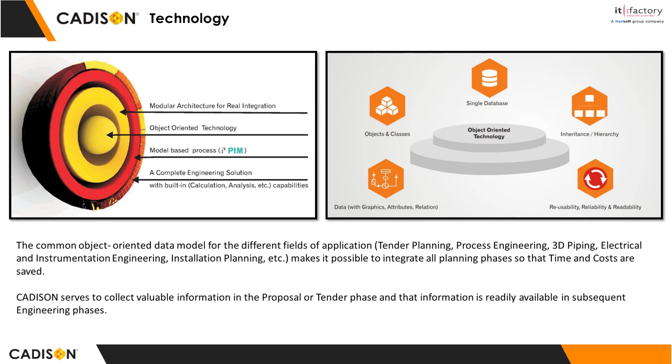Cadison is a fully integrated multidisciplinary engineering solution that combines the entire engineering workflow in one system and unites engineering data and graphics to deliver the latest updated information of the project. This automated technology, we call it I-squared PIM, that is Intelligent and Integrated Plant Information Modeling. The core of Cadison is object-oriented technology, which makes it different from other solutions. On top of this object-oriented technology, it has a modular architecture with a single database for real integration. Cadison addresses project needs with its integrated workflow and intelligent functionalities, as well as meeting standardization objectives at an enterprise level. Cadison enables entire project lifecycle integration from proposal engineering to as-built stage. Its built-in application includes project setup and project document management along with costing calculations.

So let us discuss some challenges faced by process industry teams today while working with other tools available in the market. The first is the absence of a built-in database and user or document management system. The absence of a built-in database leads to reliance on external third-party databases like SQL or Oracle, which in turn leads to additional project costs. Similarly, the absence of a user or document management system will limit internal communication and collaboration within the team, and lead to a lack of security and control of documents.

Next is lack of integration and collaboration. Multiple systems mean multiple databases and multiple teams, which leads to redundancy of efforts and data inconsistency. Everyone today needs smart output and deliverables, but existing tools, which are only CAD-based and only modeling software, are ineffective in delivering such results.

Another important challenge is efficiency during design, since they are using multiple tools. There are lots of errors and inconsistency in data involved since there are multiple disciplines and multiple teams involved. Next is lack of reusability and modularity.

Reusability and modularity are very important aspects today. With CAD-based solutions or non-intelligent databases, it becomes difficult to reuse data to use the project efficiently. A lot of time is needed for redesigning the same plant or same unit, and that's why costs go up.

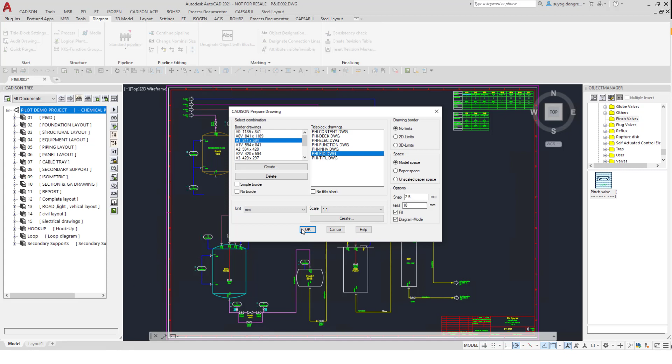Cadison has default templates or sheets for P&ID creation, where we can select the sheet size like A0, A1 and so on, and also define the scale or unit of the drawing, and we can see that the title block gets generated into the P&ID.

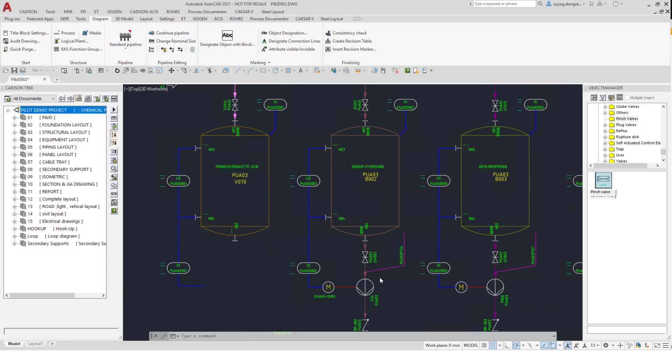Coming back to these vessels and nozzles, as we all know nozzles are always associated with the vessel, this child and parent relationship is maintained between the nozzle and vessel, which you can clearly see in this picture. Similarly, we can see other components placed in the drawing like pumps, which also maintain this child and parent relationship.

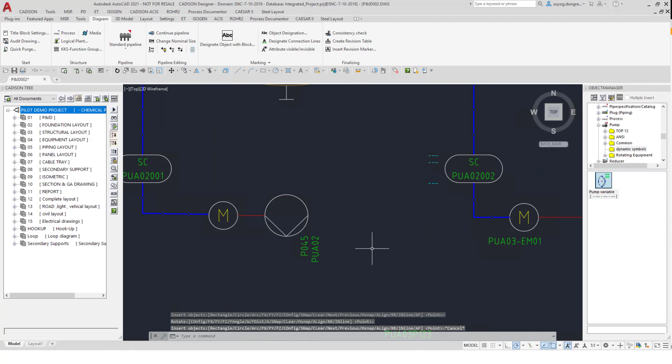Let us place some components from the library, that is from Object Manager, into the P&ID Designer using drag and drop function. Reference lines which we can see will help us place this object with proper alignment at the desired location. Now once the components are placed, we will route the pipeline.

We have defined the medias required for this project, to which different pipe specifications and catalogs are attached. Now using the standard pipeline dialog box, we will select the pipeline and choose the media. We will select the required pipe specification, select the nominal size, and start routing the pipeline.

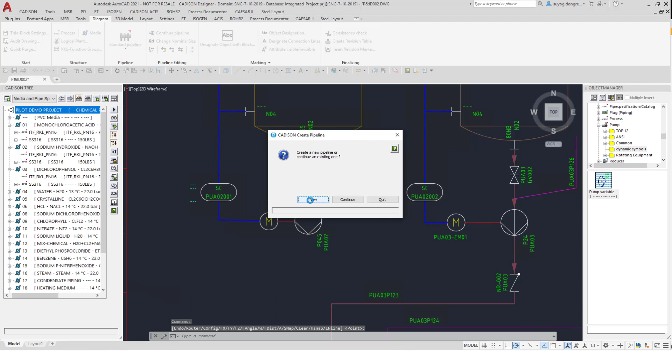So here first we will go with the suction pipeline, which will start from this nozzle and continue up to the suction side of the pump. In a similar way, we can create the pipelines for the different routes available in the P&ID.

Once these pipelines are routed, we can complete them by adding various inline components like valves, instruments, miscellaneous components, etc.

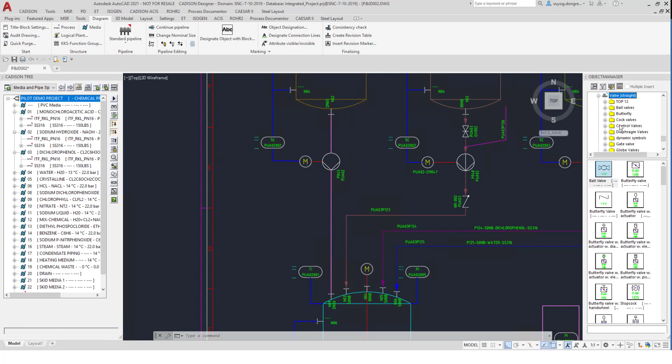Cadison has a functionality of creating assemblies of groups of objects known as construction sets, which are stored permanently in the library, that is in the object manager. We have such a construction set ready in the library.

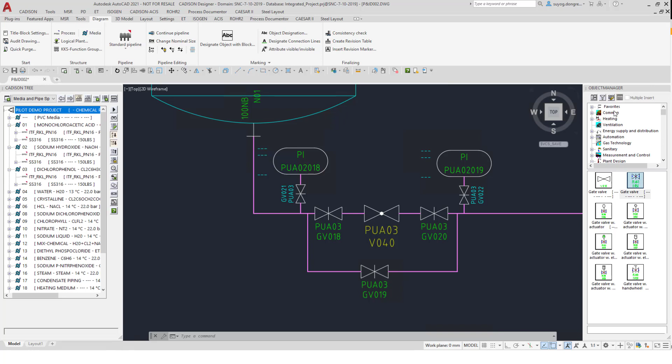We will drag and drop this existing assembly or construction set into the drawing, and place it at a desired position. Once we are done with the assembly placement, we will update the drawing for getting desired results.

In spite of being a construction set, it is an intelligent object and the data can be modified individually. We can also see that the catalog information is retained in the object.

We have a function, object designation, which helps to designate objects like pumps, tanks, heat exchangers or pipelines with the desired configuration. Here we have configured the designation to view pipeline number, size, media and specification on the pipeline object. Using this object designation, we can tag the number of pipelines at the same time.

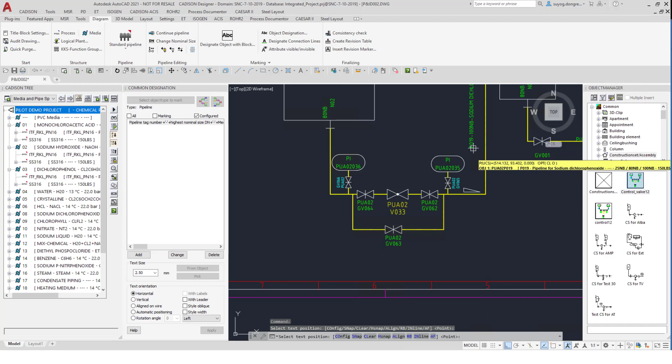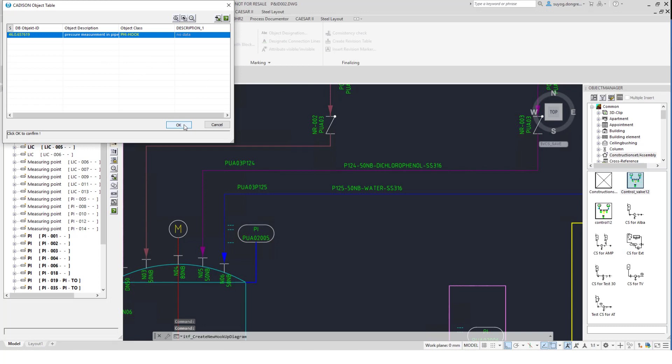Cadison provides built-in functionality for hookups, using which we can generate the hookup drawings of measuring instruments such as pressure indicator, level indicator, pressure transmitter, etc. When we execute the command, a separate document group or folder is created for these hookup drawings, from where we can open this drawing.

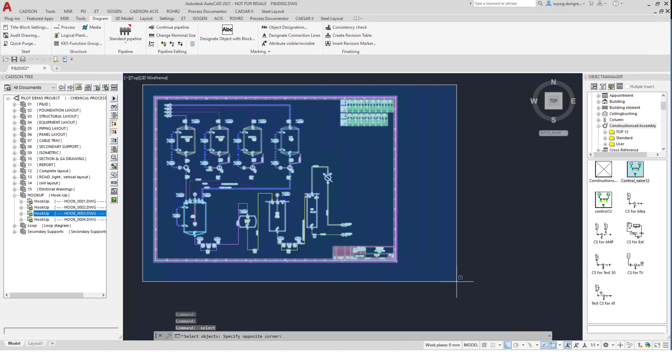Cadison provides multiple ways to edit and fill the data. In order to update the data in bulk quantity, we can select the data and export it to CSV or XML format. We can add the required information to these properties available in the CSV file, and re-import this file back into the designer.

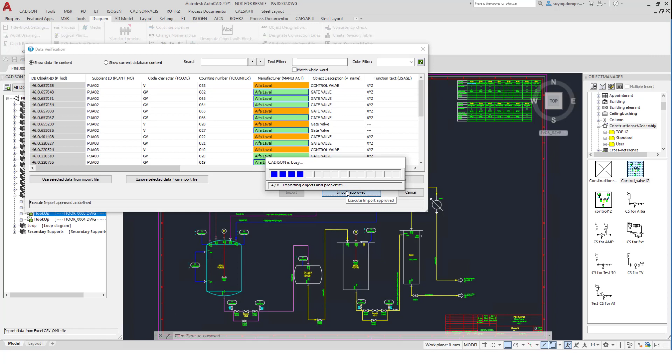During the import process, it will ask you to verify the data which we have entered in the CSV. The data which we have added gets highlighted in yellow color. Also, depending on our selection, this data will get highlighted in red as well as green color. Once we are done with this import process, the data gets updated into the P&ID drawing.

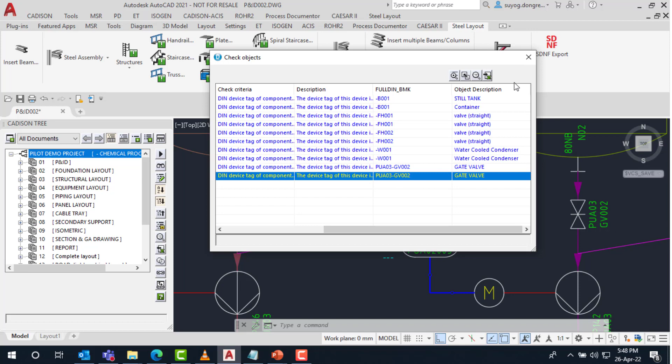Cadison facilitates logic analyzer features that consist of predefined logic checks. Let's check for the uniqueness of equipment codes. We can see the error that two of the components are assigned with the same tag number. We can even highlight the object to see the exact location.

In case of a number of errors to be solved in a large project, we have a logic analyzer container where we can store all the queries and update the wrong data in the container itself.

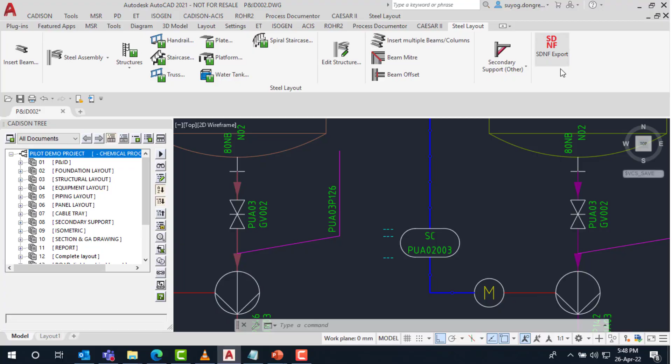This is one sample example of the equipment list which we have created. Likewise, we can generate a number of reports under one document group, and in this way list out the different objects used in the project.

Moving ahead, Cadison 3D Designer proves to be a comprehensive solution for creation of intelligent layouts like equipment layout, piping layout, isometrics, GA drawings, calculations and report generation. We also have predefined quality checks like logic analyzer for carrying out logical checks in the drawing. Let us have a look at a sample 3D drawing created in Cadison 3D Designer.

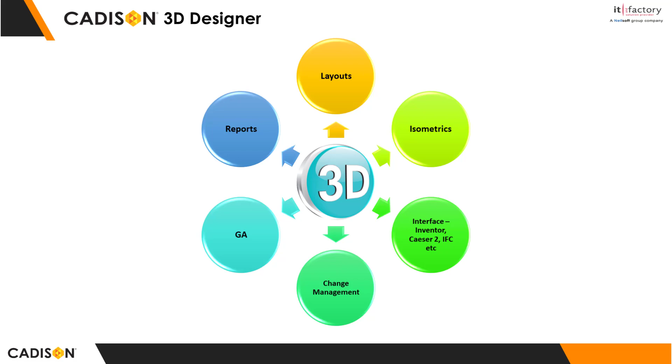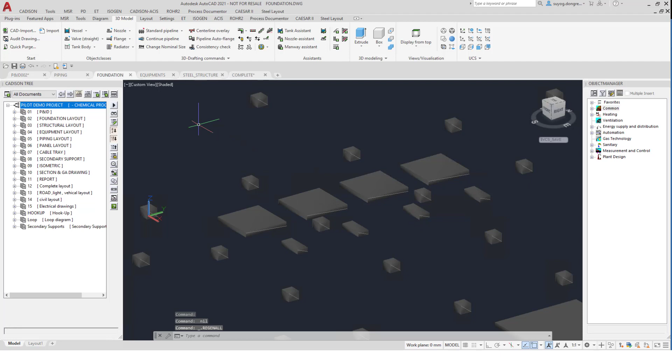This is the interface of Cadison 3D Designer which runs on top of AutoCAD. We have menu bars at the top and ribbons below the menu bar from where we can place objects in the drawing. We can see that there are different sections available like foundation layout, equipment layout, piping layout, and structural layout.

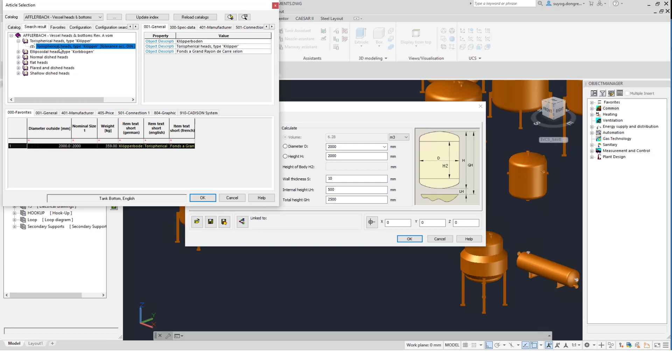Now we will see how to add different types of vessels into the drawing. Tank Assistant is one way of vessel creation, through which we can create vertical vessel, horizontal vessel, or special vessel. We can define the inputs for the tank components like shell, dish head, legs, etc., and even save this configuration to use later with all the necessary parameters required for vessel creation.

Also, we know that this vessel is already placed in the P&ID drawing, so we can link that vessel to this 3D graphic. This shows that Cadison works as one integrated system and uses a single database. We can then place the vessel in the drawing at the desired position, having all the intelligent data inside it.

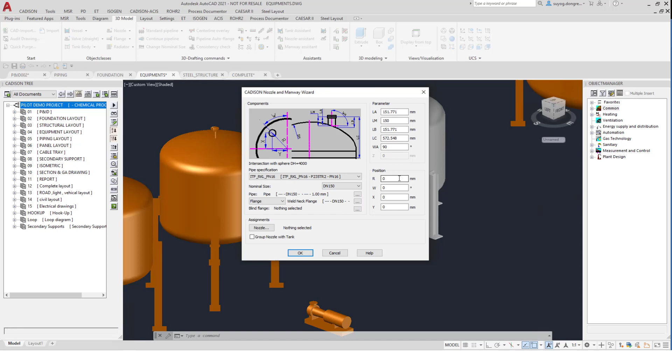In order to provide pipeline connections, we will add nozzles to the vessel, for which we have the Nozzle Assistant Wizard. Based on the type of surface selected, the Nozzle Assistant dialog box opens up, where we can feed inputs for the nozzle as per the parameters shown in the figure. We choose the pipe specification, nozzle size, type of flange joint, and we can see the nozzle has been created. We can also easily edit the nozzle once it is placed in the drawing.

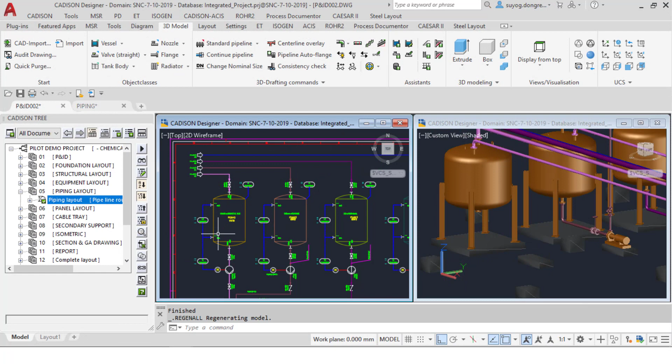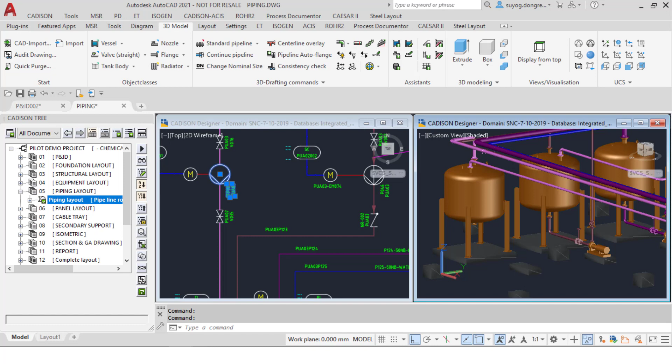Now, after placing the equipments, let's create a pipeline. There are many ways to create a pipeline in the project, and we will see them one by one. We know that this P&ID is already created, and Cadison works as an integrated system using a single database. First, we will go with the drag and drop option to create the drawing in a 3D layout. Here we can see that this pump is already created in the P&ID drawing, so we will utilize the same pump to create the drawing in 3D.

So we will just drag and drop this pump. Here we can see that the graphical objects for these pumps are automatically generated, and we can place this pump into the drawing as per the required coordinates. So now we will place this pump on the foundation.

Here we can see this Cadison integrity function, and it helps us to synchronize the data within the different modules.

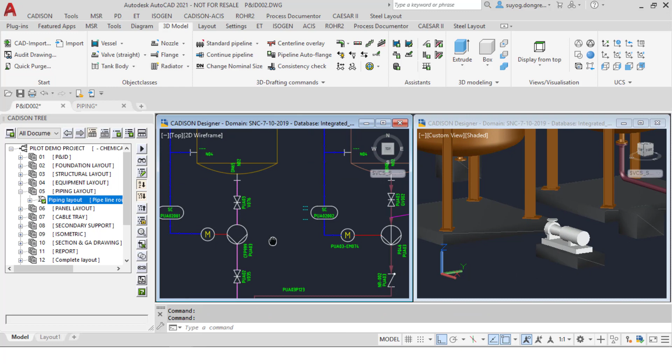In a similar way, we can create the pipeline. Let us drag and drop this pipeline from P&ID drawing into the 3D drawing. Once we drag and drop this pipeline from P&ID to the 3D, this standard pipeline dialog box will open.

As this pipeline is already created in the P&ID, the pipe specification and the media properties are disabled for further addition.

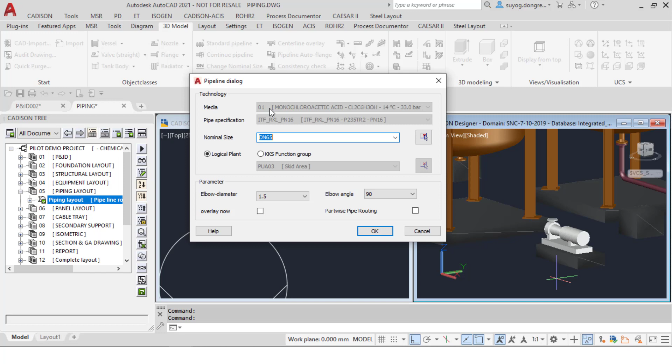Also here you will see two options: one is overlay now, and the next is part-wise pipe routing. This helps you to route the pipeline. So first we will go with the overlay option.

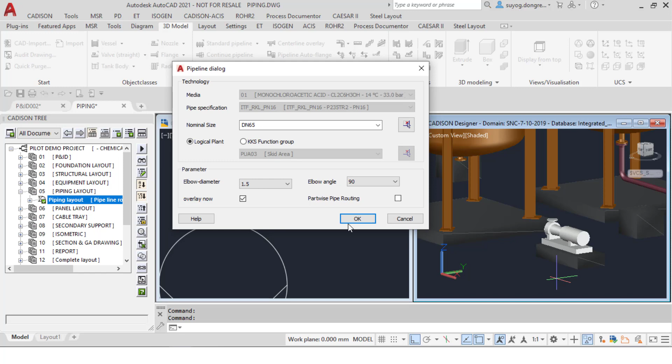The overlay option uses a single line representation, and with the help of this, the pipeline will get created. Being a Cadison intelligent object, we have predefined connection points which help us create the route for the pipeline. Here we have selected the first point of the nozzle, and now we have created the suction side of the pump.

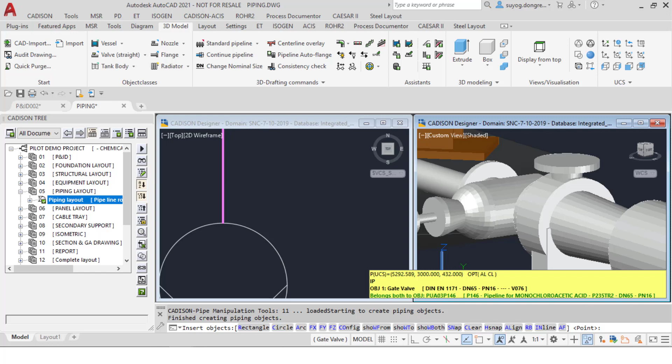As soon as this route is completed, the 3D graphic for this pipeline has generated, and based on the direction, elbows, flanges, gaskets, etc. are automatically created.

Now we will complete this pipeline by adding inline components, for example a valve. Again we will drag and drop this valve from the P&ID to the 3D, and try to place it on the drawing.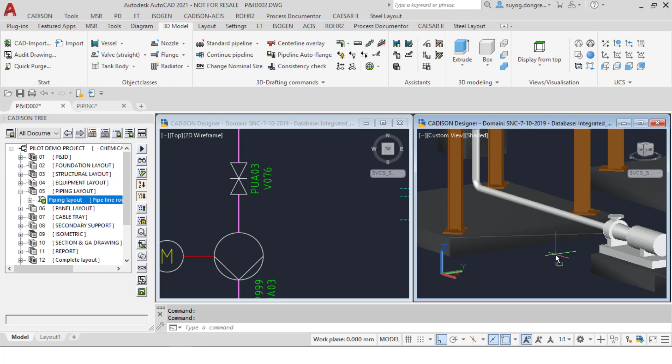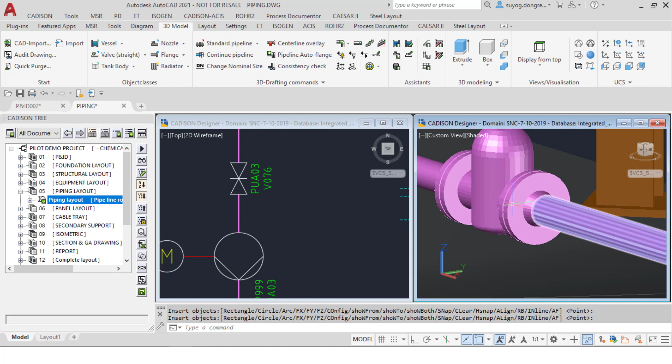Here you can see that this automatic graphic has generated, and once we place this valve on the pipeline, it will automatically create the counter flanges as well as the gasket as per the pipe specification which we have attached. Apart from that, once we are done with this object placement, we can move and rotate these objects on the pipeline.

Now let us route another pipeline from pump discharge to the tie point. Again, in the standard pipeline dialog box, we can select the media, we can select the pipeline, we can select the specification, and before clicking OK, we will select the checkbox for the part-wise routing.

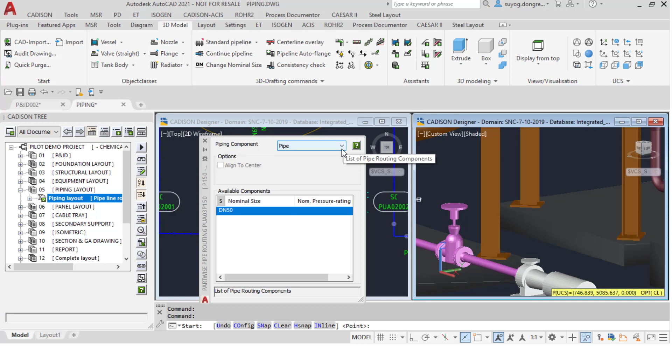A dialog box will open up which shows the piping components from where we can select the pipes and fittings for the line. So when we start drawing the pipeline, the piping components are generated automatically, like flanges, pipe, elbows, tees, etc.

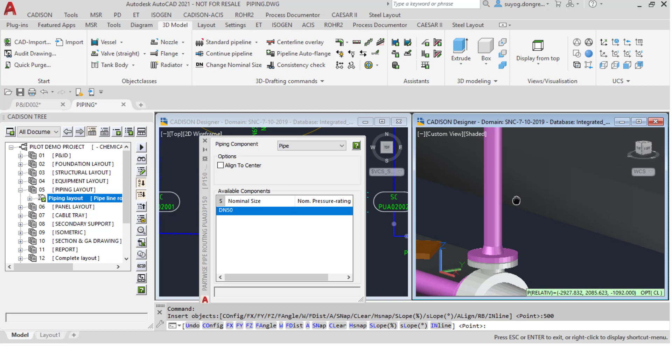As we change the route by cursor, the command automatically predicts the next component as an elbow, and we can continue the pipeline without any interruption. In this way, we can instantly create pipelines for our project.

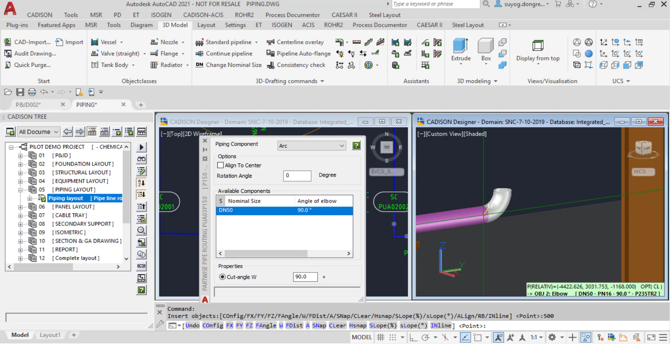Now suppose if we want to create a T connection in between, then we can select the T from the dialog box, and the same is reflected in the drawing. In such a way, we can manually select the components and complete the pipeline routing.

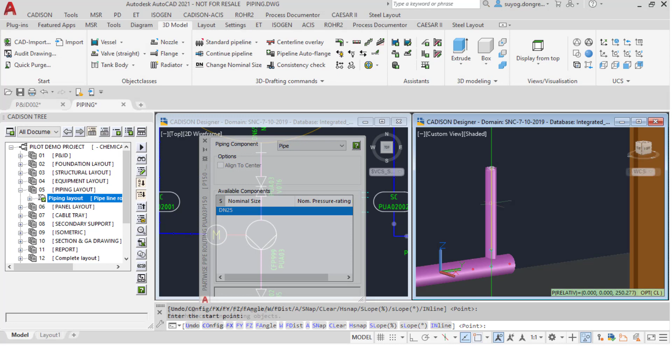Also, we can continue the pipeline from where we left off. Here we will continue with the T branch and route the pipeline. We can see that based on the dynamic input, the pipes and fittings are allocated to the cursor, and we can carry out this pipe routing till the end.

And this is how quickly we can reproduce this pipeline with the part-wise pipe routing command. Now we will complete the pipeline by adding valves to it. We can directly select the valves from the catalog.

The catalog is the set of data where we have defined the object properties, and based on the requirement we can configure the selection, such as the type of drive like manual or pneumatic. We can select the spacer type and then select the valve.

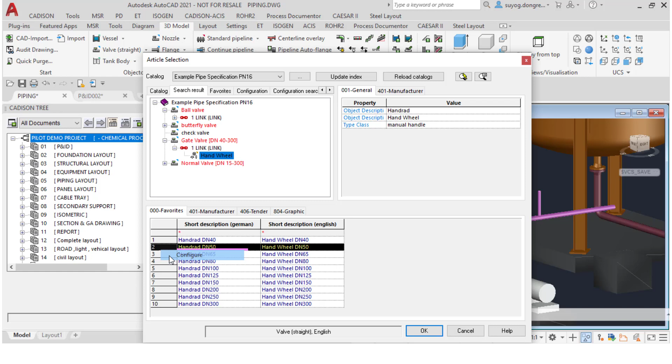Instead of having a number of objects with different attributes and types, Cadison allows you to manually configure the object type. This helps the user create their own configuration sets, which can be saved in the library for reuse.

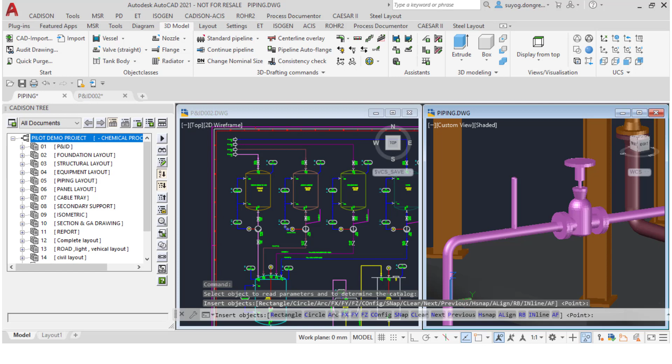So we will place the valve in the pipeline, and being a Cadison intelligent object, the counter flanges and gaskets are automatically created as per the specification used, and later on we can move or rotate the object within the pipeline as desired.

After placing all these components, we will place primary supports on the pipeline. We can choose different types of primary supports from the catalog and place them on the pipeline.

Here we can see that we can configure the different types of supports, configure the material, and save this configuration for reuse.

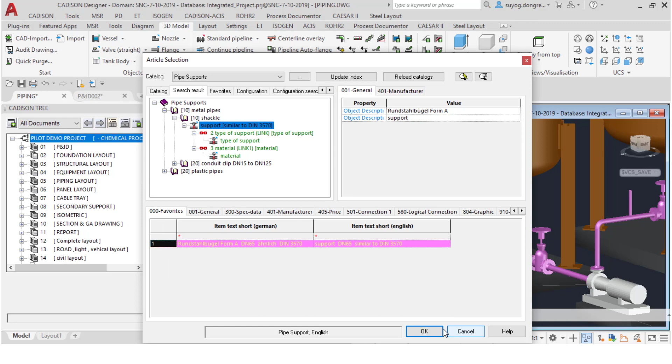Once we place this support on the pipeline, it changes color, showing that the support is linked with the parent object, the pipeline, and forms a part of it. This support will also appear in the isometric drawing. In the same way, we can place the rest of the supports on the pipeline.

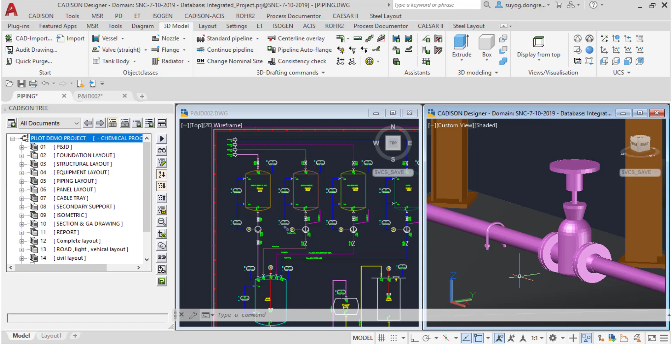Now we will move on to the isometrics. Cadison has an isometric generation wizard where you can select the pipeline for isometric generation. Here we can select the document group, sheet size, and title block. We can also preview the isometric before generating it, to check for broken links or any errors in the preview itself.

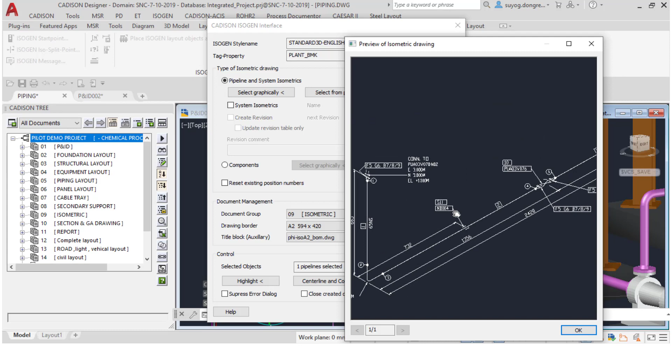Then there is a checkbox for 3D graphics, which shows the 3D pipe in the isometric. This is helpful for vendors at the time of fabrication, giving a clear picture of the isometric.

We can see the isometric file generated with a clear view of weld symbols, tag numbers, walls, branching, etc. On the right-hand side, we can see the bill of materials showing different materials and quantities used. On the bottom left, we can see the 3D graphic of the pipe. In the Cadison tree, we can see the isometric file generated under the isometric document group.

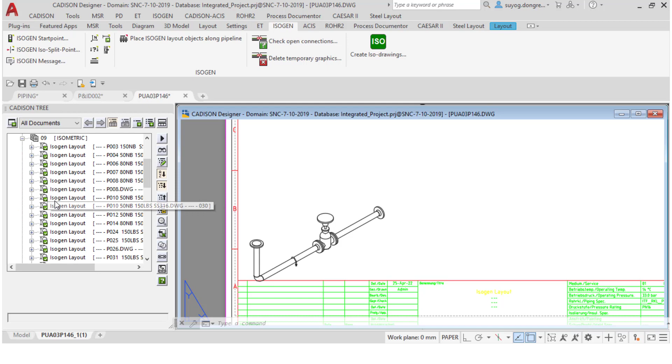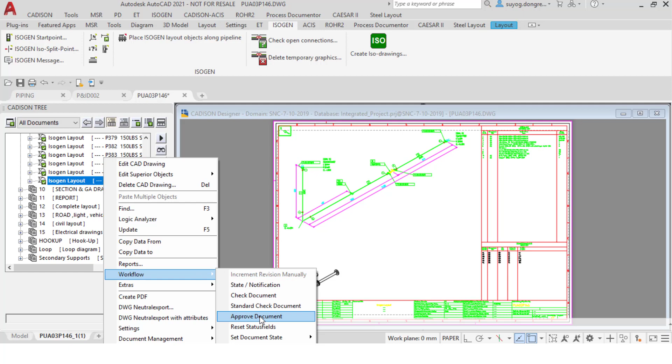Once the isometric drawing is generated, the pipeline and inline fittings should not be modified, so the user can lock the pipeline for further editing. We have a setting in Cadison so that as soon as the isometric drawing is approved, the pipeline can be locked for further editing. A user cannot move or modify any inline component within the pipeline, attach any new catalog, or even delete components. This helps protect the pipeline from any unwanted modification.

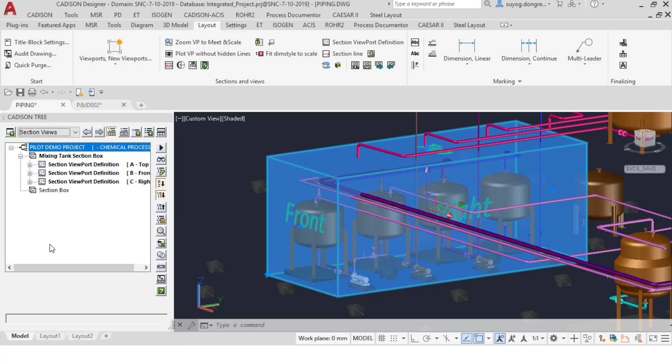Now we will generate the GA drawings. With the help of the Cadison section box, we can define the area to be captured in the layout. If we filter the section views in the Cadison tree, we can view the section box as an object. We can create a default template for the sheet where we select the sheet size, title block, scale, unit, etc.

Then we just drag and drop this section box into the paper space. We are asked to choose the view direction, whether top, bottom, front, or left view. We will select the front view. As per the defined scale, the layout will be generated. We can see the viewport generated in the drawing as well as in the tree. In a similar way, we can place the rest of the viewports in the drawing by drag and drop.

Now if we update the area of the section box, the same will be reflected in the layout drawing by updating the viewport. We can see that this viewport area is updated as per the changes in the section box.

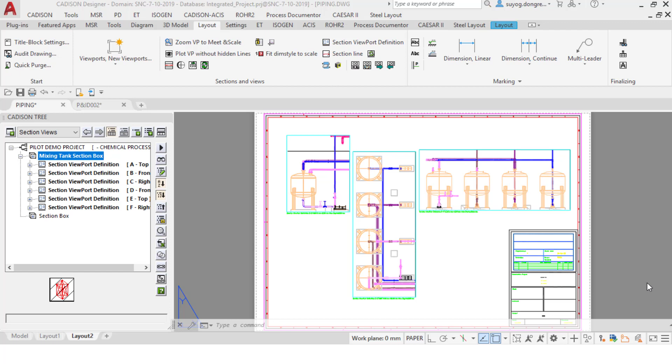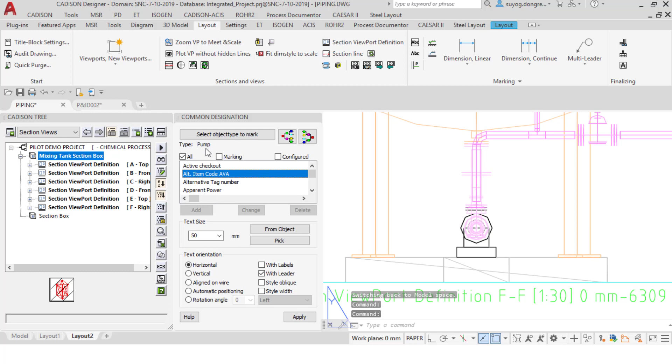Now for labeling the drawing, we have the common designation command where we can designate the object with the respective properties. We can also display the properties of a single object. Here we will label the pump with a device tag number, where we can define text orientations like horizontal, vertical, with leader, without leader, etc.

In a similar way, we can designate other objects, for example, valves, vessel, heat exchanger, etc.

After the 3D drawing is completed, we can generate reports from the project level. We have this report generation wizard with a number of predefined templates commonly required for report generation, such as bill of material, pipeline list, valve list, etc. We can generate the reports in Word format, Excel format, and PDF format.

Also, there are other disciplines to segregate the report types, such as plant design, electrical engineering, MSR, project management, etc.

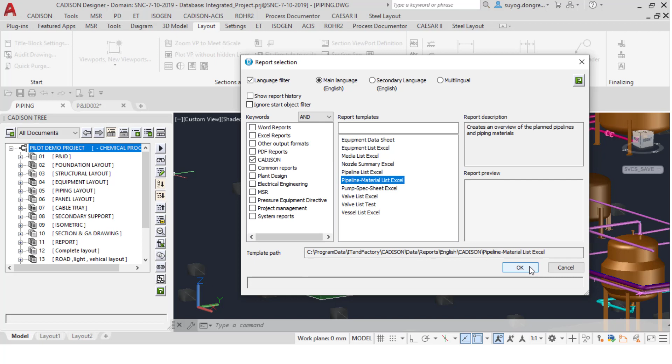So we can try generating a report for the pipeline material list. We can select the document group in which the reports will be stored. We can also change the file name if required, and we can see that the report will get generated automatically.

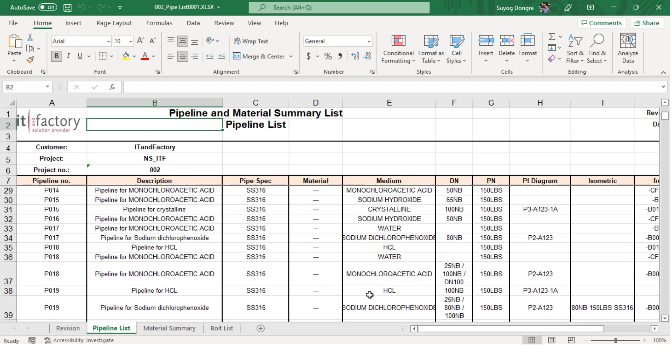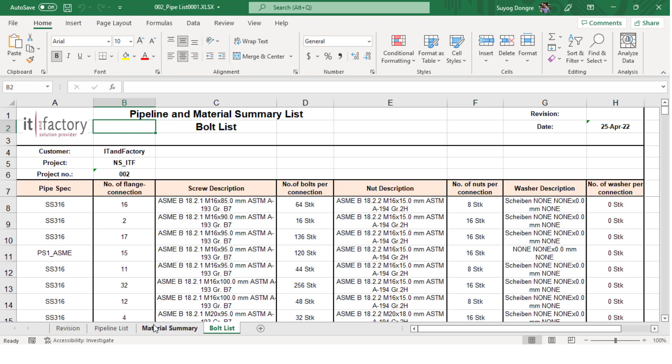All the relevant data related to the pipeline and inline fittings are displayed in this Excel sheet. We also have other data such as material summary and the bolt list, and all the pipeline and pipeline fittings present in the project are covered under this pipeline list.

In the same way, we can generate the word report for the valve list for all the valves available in the project, where we can see valve-related data such as tag number, description, material, manufacturer, and so on. Likewise, we can generate a number of reports under one document group.

So in this way, we can list out the different objects used in the project. Also, we can pass on this information to the suppliers or non-AutoCAD users.

Cadison provides a functionality that allows you to quickly do change management and revision of documents. As Cadison works as one integrated system, any changes carried out in the P&ID drawing will be reflected in the 3D model and vice versa.

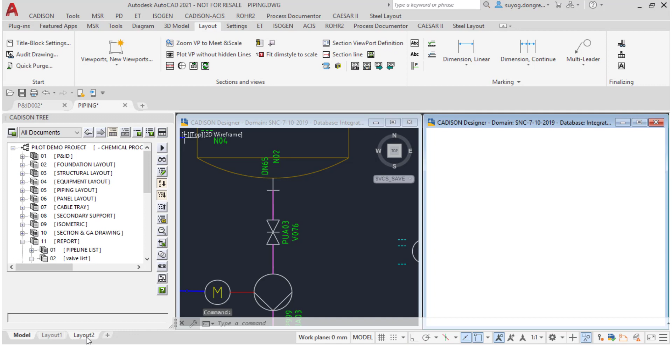Let us take the example of this valve having tag number V076, which can be seen in the 3D drawing as well. The same valve is also available in the GA drawing and in the isometric drawing. So we can see that this tag number, V076, is available everywhere. And if we open an already created report for the valve, there also we can see this tag number, this valve with tag number V076.

Now suppose we receive a change in the P&ID drawing, let's say the tag number has changed to V999. Once this change is carried out in the P&ID drawing, the same will be reflected in the 3D model. We can see that this device tag has changed to V999 in the 3D model.

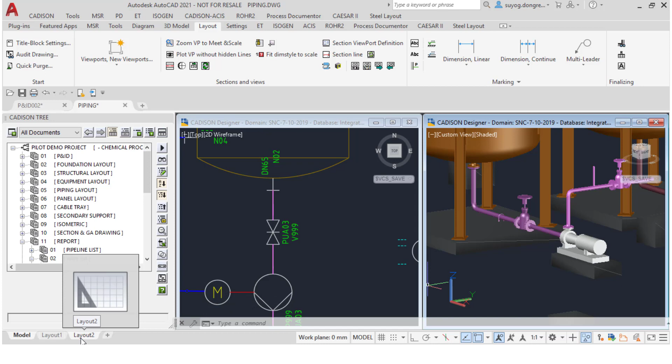Similarly, this change is carried out in the GA drawing as well. So here also you can see that the tag number has changed to V999.

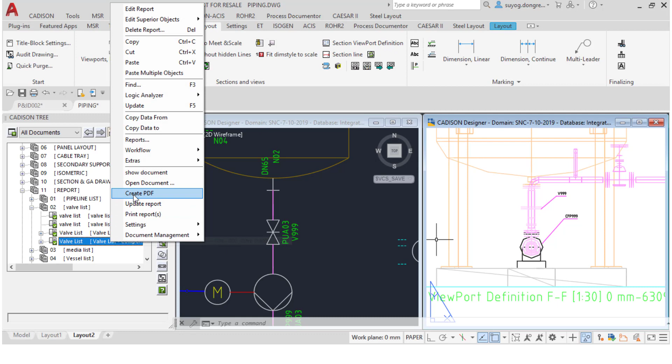For reports, we don't have to create the report again. We will update the report, and a revision of the report will be created. We can add a revision text or comment, such as 'valve tag number has updated.' Then we can see the valve tag number is updated, and also a revision comment or revision mark A is marked on this report.

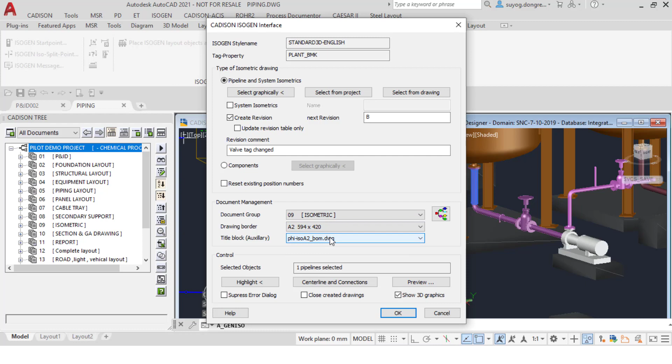We can update the isometric drawings as well. If we select the same pipeline while generating the isometrics, it creates a revision and we can add the revision text, choose the document group, sheet size, and then the isometric revision is generated. We can see that the valve tag number has been changed to V999, and a revision is also created for the drawing.

So if we filter the structured view to documents and revision, we can see that all the revision files of the reports as well as the isometric drawings are stored into the project.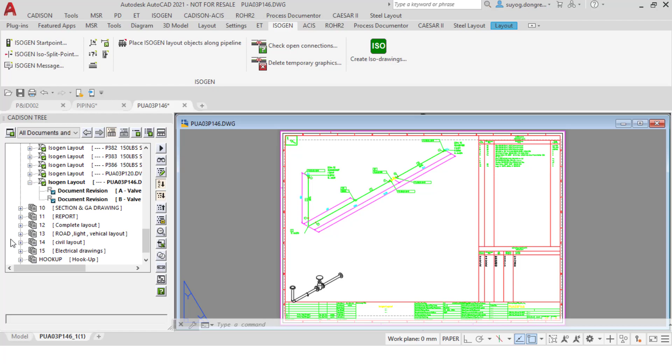As of now, we have seen different modules of Cadison like PDM, P&ID Designer, and 3D Designer, and we've seen their different unique features. Now let us explore one more interesting feature of Cadison, and that is the process documenter.

A process documenter helps us to create fast and accurate process documents from Cadison P&ID Designer. Before getting into this feature, let's get some idea of process documentation first.

Process engineers describe a process with different measures in relation to the elements of the plant and its interconnected pipelines. Defining this entire process with all interconnected details is known as process documentation. Process documentation is key for the early stage of process engineering.

We all know that a P&ID provides the foundation of design on which the rest of the project relies. In the case of process documentation, this P&ID diagram acts as a master document. During the operation phase of the plant, these P&IDs can be visualized with details for the different processes and their process steps.

For example, every industry has standard process documents for most of the processes, like plant shutdown, tank maintenance, filter cleaning, etc. In these process documents, every process step is displayed with different colors and line types in the P&ID, with various states of inline fittings for easy identification.

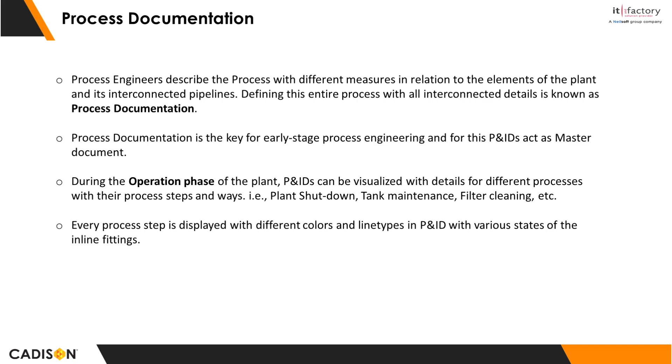With this feature, we can overcome these bottlenecks and create fast and accurate process documents from the Cadison P&ID Designer itself. The first step is to define a process, then add the process steps required to carry out this process.

Now we can attach the required pipe routes, fittings and equipment to the related process steps. Once we have attached the required elements of the plant, we can define their states, like whether a valve should be open or closed for this process. After this, we can have a preview of each process step we have defined.

After defining all these steps, we can create a multi-page PDF document for our processes. This PDF document is exported outside Cadison, and there we have our process document.

So let's say there have been some changes in the P&ID. We need not redefine all the process steps again because it is getting saved inside your Cadison project. So we can always go back to Cadison and make the necessary changes, and again export the PDF so that we have the updated process document for further review purposes.

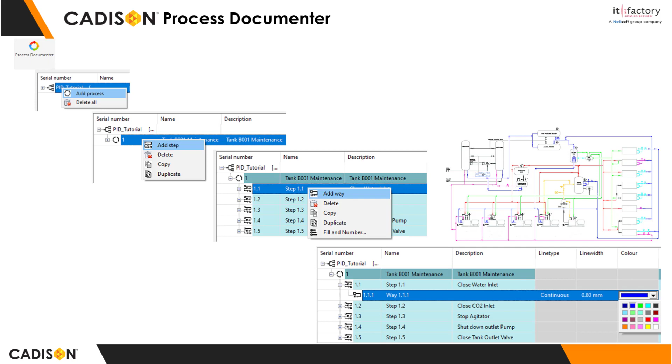A process will have certain process steps which must be executed in sequence in order to carry out the process. For each step, we can define the process way to which all the related piping components will be attached, and we can define graphical parameters like color, line type, and line width for each process way.

Once all the process steps and their ways are defined, we can take the preview of them before exporting the process document. After verifying the necessary things from the preview, we can export the process document with a single click, which will create a multi-page PDF file for our process.

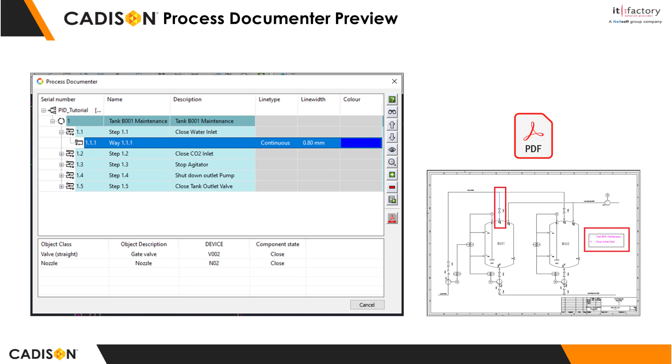Now we will see this process in detail. First we need to define a process. Here we have this sample P&ID of a mixing tank, where you can see there are two mixing tanks with the tag numbers B001 and B002.

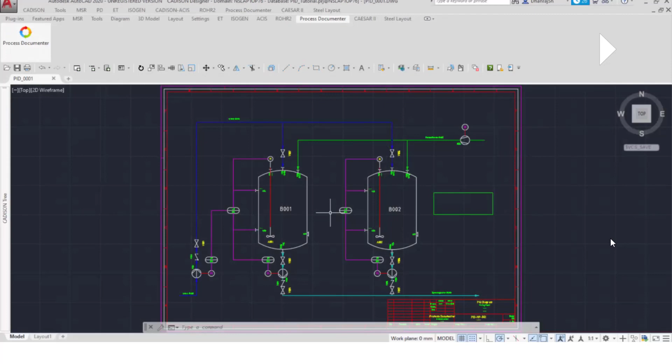Now we want to create a process document for the maintenance of tank B001, which is on the left hand side. First we will start the process documenter, and there we have our project as the top node. Under this project we can create a process with the name 'Tank B001 Maintenance,' and we can also add a description of the process.

After defining the process, we will have to maintain the steps required for our process. So for maintenance of tank B001, we will add some steps one by one. The first step we will add is for the close water inlet.

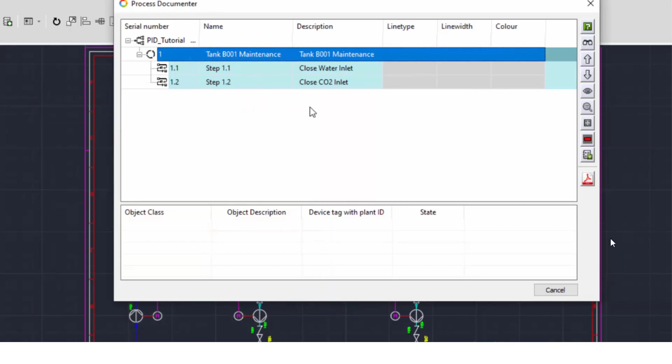The next process step we will add is for close CO2 inlet. The next process step will be for stop agitator. Next step is for shut down outlet pump. And at last, we will add a process step for close tank outlet valve.

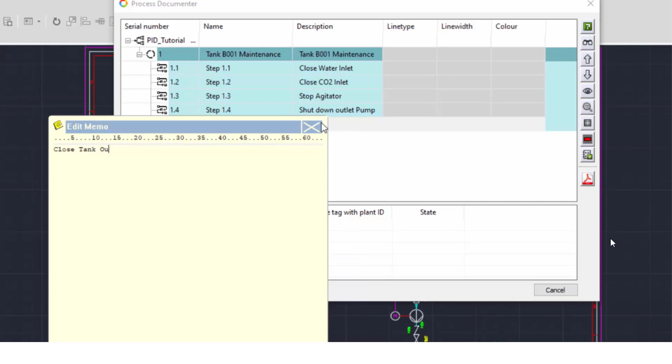We have defined the process steps. Now the next step is to attach the required components of the plant to the respective process steps. Each process step must have a way, and all the required components can be attached to this way. So we will add a way under each process step and attach the required component to them. Let us start with the first step.

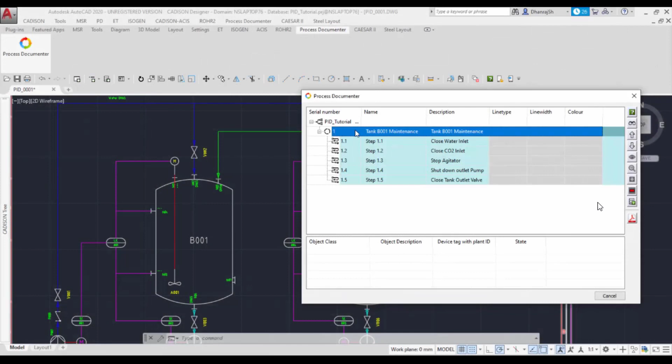We are adding a way under this step, and this way will be attached to the required piping components. For these steps, the required components are the pipe route of the water inlet and its inline valves, and the nozzle of the tank.

With this way we have attached a valve and a nozzle, and for them we can define a state, like it should be open or closed during the process. In order to close the water inlet, we have to close this valve and the nozzle. Here we can define the graphical parameters for this way, like its color, line type, and line width.

So here we have defined our first process step with its way successfully. Similarly, we can add a way under all steps and attach the required piping components. Now we should define unique graphical parameters to each process step in order to identify them easily in our process document.

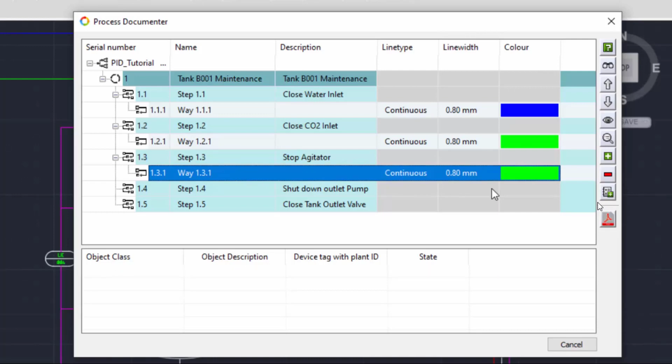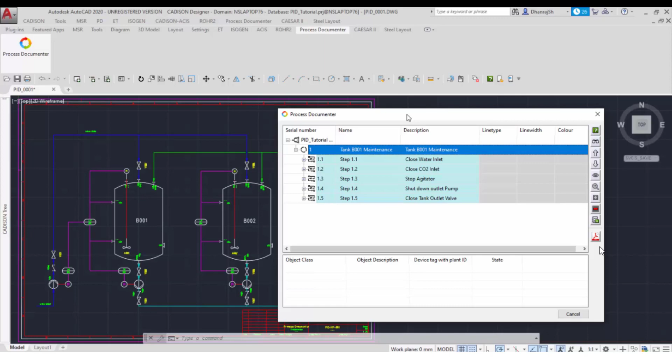Now we have defined all the process steps and the way for our process. We can have a preview of each process step before exporting our process document. Once we activate the preview, only the components attached to the selected process steps are highlighted with different graphical parameters, and the rest of the P&ID is grayed out, so we can easily identify the components relevant to our process steps. Here we can see that once we select any process step, it highlights the attached component.

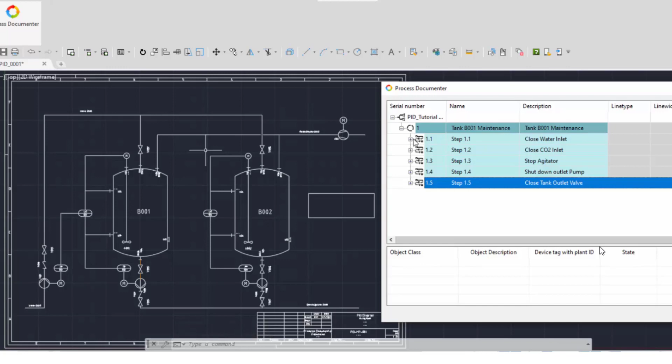Now we can create the process document as we have defined all the process steps and the way. To create a process document, we just have to click a single button and it will create a multi-page PDF of our defined process. It will plot each process step on an individual page and combine all these pages into one single multi-page PDF.

Here we can see that the process document for our process, tank B001 maintenance, has been created. Every time we export a process document, it will create a single file for each process, and each process step will be on a new page in that particular PDF.

In our process, we had 5 steps, so a PDF with 5 pages has been generated. On each page, the piping components related to one process are printed with the defined graphical parameters, and the rest of the P&ID is grayed out. So this is how we can define different processes under our project from the P&ID designer.

If some of the components are changed in the P&ID, we just have to attach the updated components to the relevant process steps and export this process document again, and we will have our updated process document with us. There is no need to recreate all these process steps or redraft the whole process document manually.

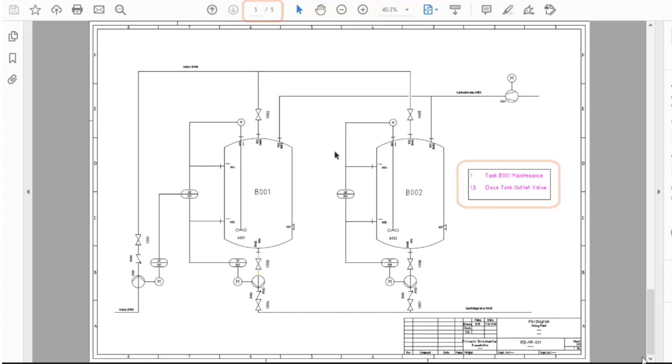For any organization, interoperability between different engineering teams and tools without any error is a challenging task. Cadison has got you covered here as well. Its various interfaces enable seamless transfer of drawings and data, which allows users to easily integrate Cadison workflow into the current business workflow and supplement the existing investment of the organization, keeping the total cost of ownership low.

For example, here we can see some of the third-party interfaces with Cadison, where we can perform IFC export, IFC import, and CAESAR interface for stress analysis, and so on. So all in all, Cadison with its interfaces and interoperability creates a cohesive workplace for better integration.

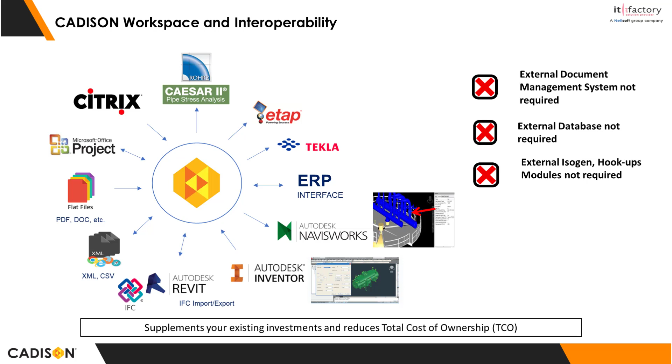So what are the USPs and benefits that make Cadison stand out among other CAD tools available in the market? First is user and document management. Then we have better integration and parallel collaboration. Next is greater reliability. Also we have powerful checks and validation features, change and revision management, configuration flexibility, and of course, process documenter.

We have covered all the points which can help you digitalize your workflow. An integrated engineering software solution contributes to increasing efficiency and lowering costs during plant design, planning, as well as during operation. Digitalization and integration of the entire engineering process are important building blocks for increasing competitiveness and the futuristic direction of the entire plant industry. Thank you for your attendance.